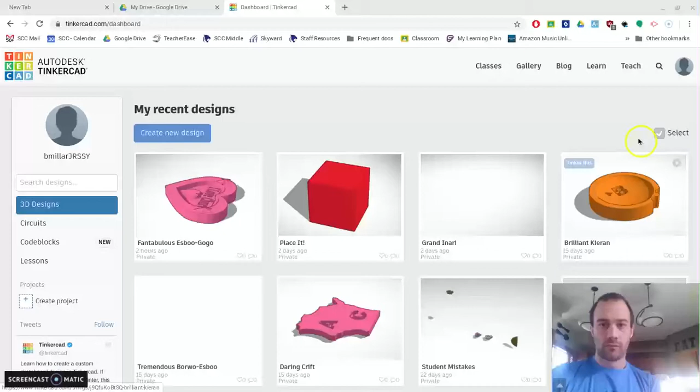Right now I'm just at the main screen. If you want to do this along with me, you can pause the video and work through it, or just watch, do the starters and lessons, and try this as you're working. You can always get back to the main screen by pushing the Tinkercad logo. I'm just going to say create a new design. You can see I have a whole bunch of student designs up there from helping students.

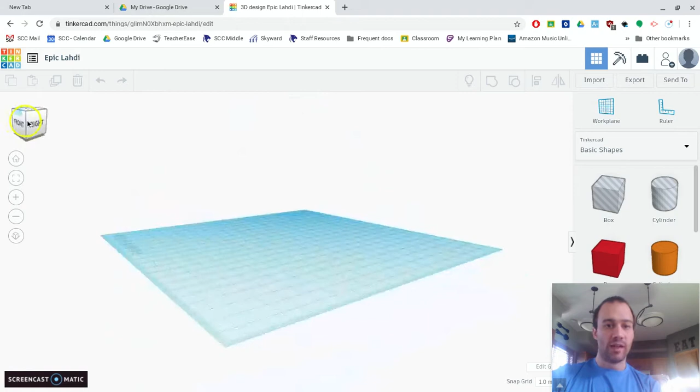Now, the first thing you're going to see: this is your work plane, the main area that stuff is going to be put down on when you grab it out. Up here in the upper left, this is the view cube. You can click and maneuver this around so you can see all different sides of your object, and zoom in and zoom out. If you ever get in a weird spot, just click on that home view to get right back to normal.

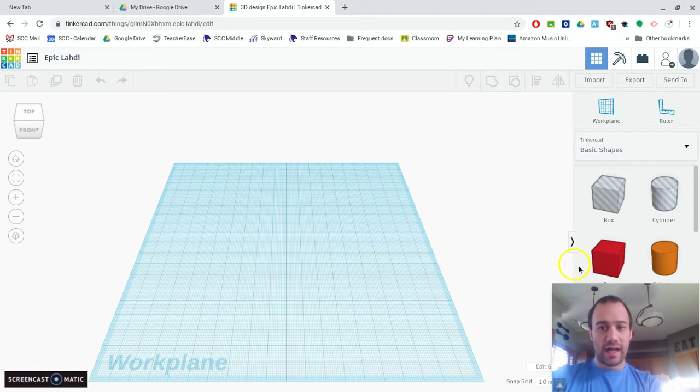So the first thing I want to cover is pulling stuff out from over here. Here's the box, let me move my camera. Here's the box shape. If you pull it out, you can put it out on the work plane, and that's where it gets set down at.

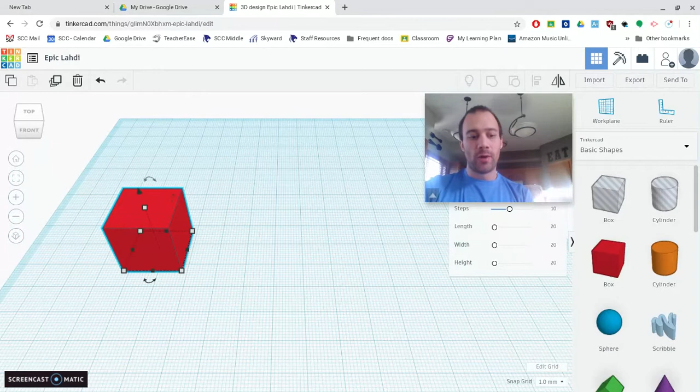Now I'm going to zoom in. You can also use your keyboard or your mouse trackpad to zoom in. One of the tough things when you're zooming in is it zooms into the center. But on your Chromebook, you can maneuver around by holding the Control key, the Shift key, and then clicking and moving it around, so you can look wherever you want on your object. Again, that's Control, Shift, then click.

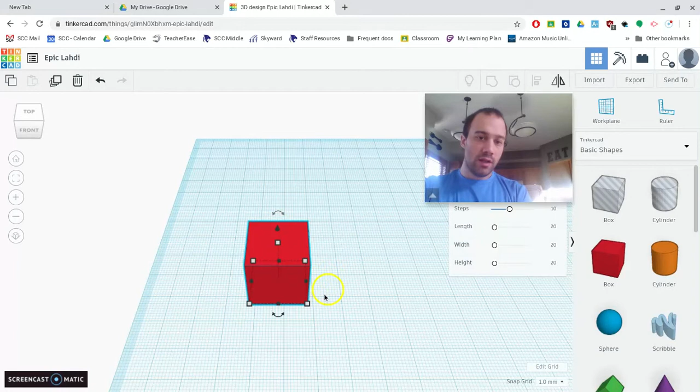So here's my box shape. If I want to make the shape bigger or smaller, these white handles and these black handles are going to do that for you. This cone shape one, we'll cover in a bit. The white handle is going to move both sides at the same time, so you can see I can just kind of free move it right here.

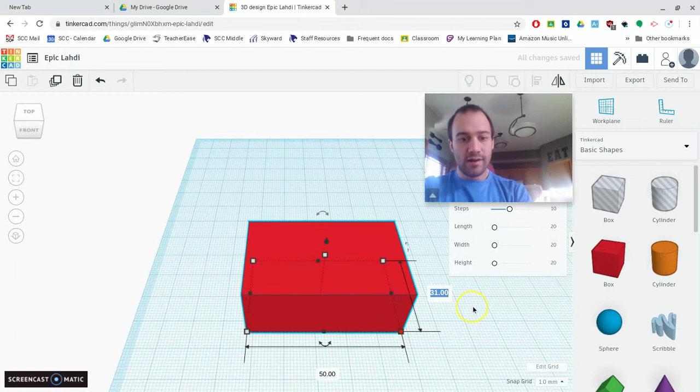I could also just type in whatever size I want. Now this is measured in millimeters. Every big box right here is a centimeter, and every little tiny box you see in here is a millimeter. So right now this box is 31 millimeters by 31 millimeters. I could type in a number like 50 by 45, and it will make my box that size.

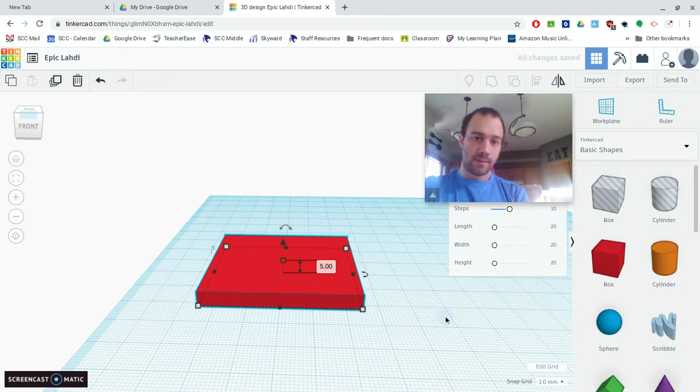This white one up here, I'm going to turn it to the side so you can see a little bit, that's the height of the box. If I click on that one, I can drag it up and down like before, or I could just type in what I want, for example 5. And now I made my first little object here.

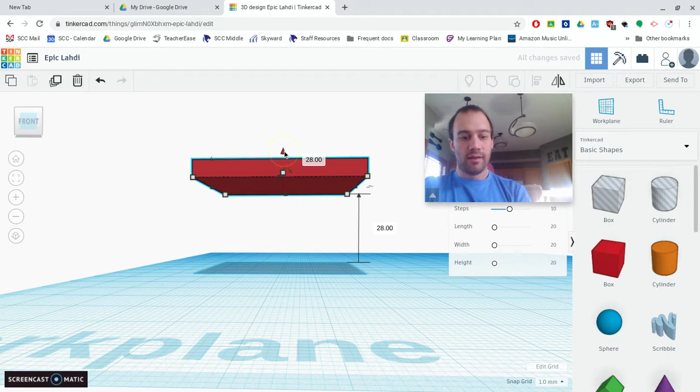This cone shape helps you lift things up and down off of the work plane. Right now it's set flat on the work plane. If I click on this and drag up, it goes up in the air, and I can see right here how far up in the air it is. I'm going to hit Control Z to undo. There's also an undo button right up there.

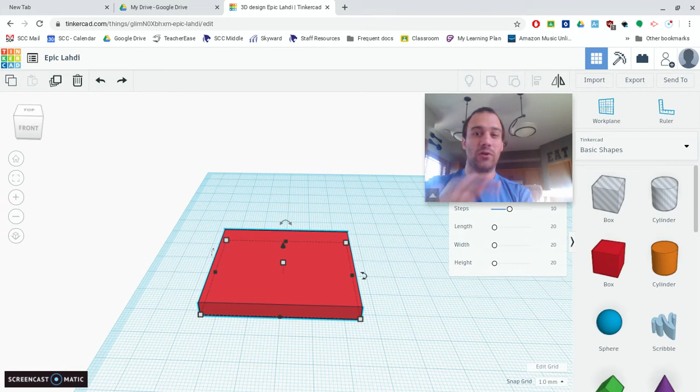Now, if at any time you're doing work in Tinkercad and you see down here where mine says screencast-o-matic, that's the video program I'm using to make this. If it's red and says not connected or something like that, you need to leave Tinkercad and refresh it, because that's not going to save any of your work. So just keep your eye open for that.

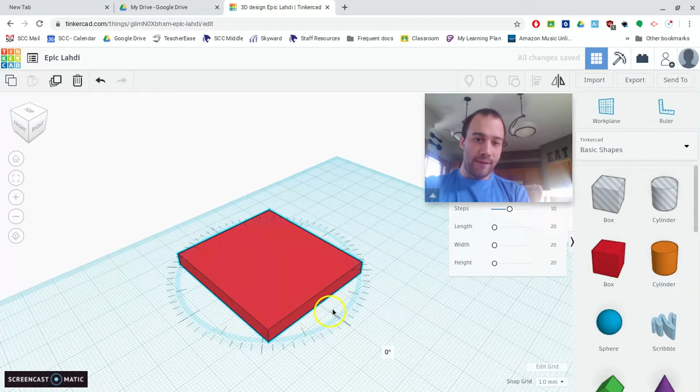The next thing you'll see, we had these arrow handles here, here, and I can see another one right there. If you don't see one, just turn your view cube so you can find them. These will help turn your objects. So here's one right here, and I can turn it this way. The arrows show you how it's going to rotate. If I rotate close to the object, it makes big jumps. If I rotate further out, it makes small jumps, 360 degrees around. This one right here, you can see it's going to rotate more on that vertical plane.

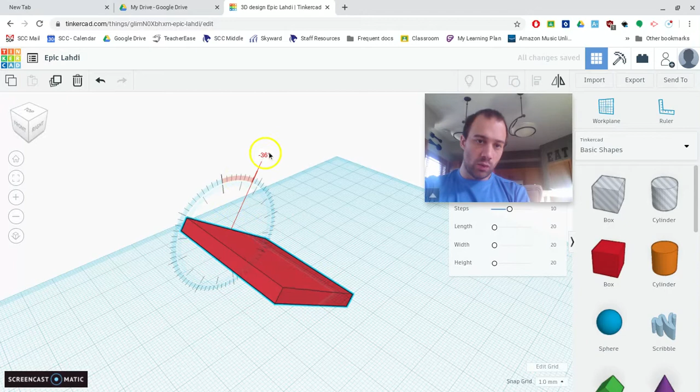And then lastly, this one right here will tilt it this direction. So that's how you're going to use the basics right there.

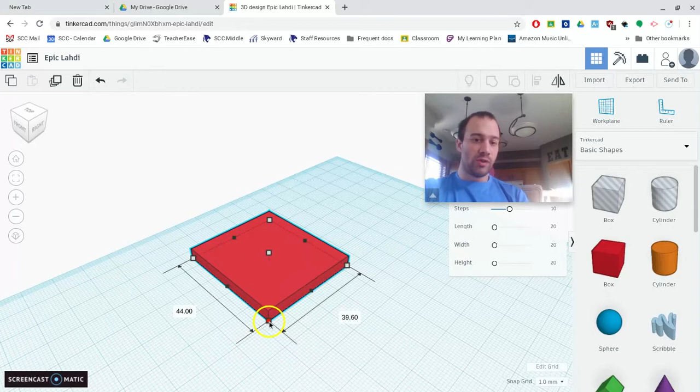The next thing I want to cover: let's say you love this size where one side's 50, one side's 45, but you have to make it a little bit smaller, and you like the ratio you have going on there. Good math term. If you hold the shift key as you grab that box, it will scale everything down perfectly, even if your mouse goes in weird spots like mine is. It won't skew that symmetry that it has. So the shift key will help you do that.